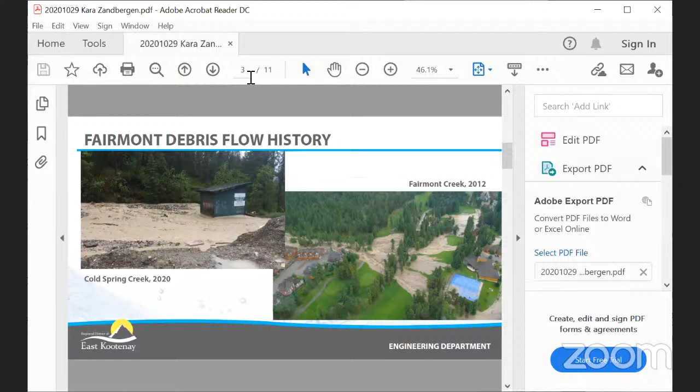So as we all know now, most of the community of Fairmont is built on the debris flow fans of Fairmont and Cold Spring Creeks. Sometimes we forget how the land under our feet was formed when there were large periods of time between events, but we have had some reminders in the last several years. In 2012, we had a fairly large debris flow event on Fairmont Creek. This was a big reminder for everyone of the hazard. Very thankfully, it was a reminder that came with some property damage, but no loss of life. In 2013, we had smaller events on both creeks, and then again in 2019, and most recently, we had our May 31st event this year. Next slide, please.

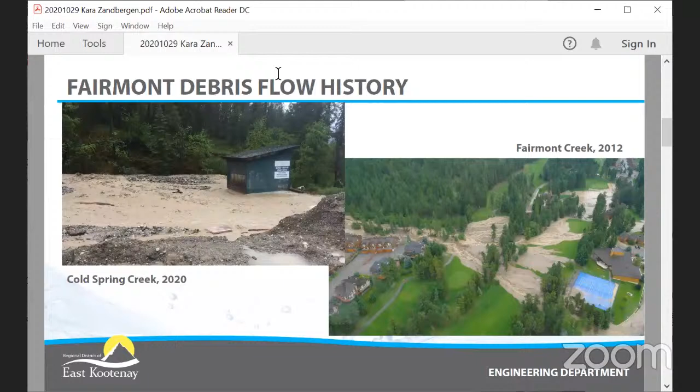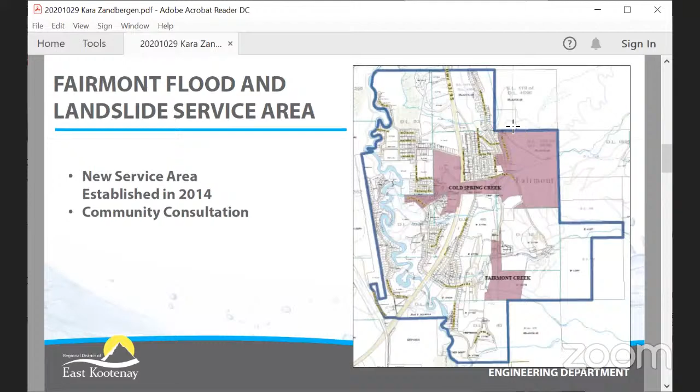So we wanted to discuss some of the services that are provided by the Fairmont Flood and Landslide Service Area. So we conduct regular inspections of the mitigation structures, and we report on them to the province. We do maintenance, debris removal from the containment basins, and any other repairs that are required, like riprap repairs or vegetation control. We apply for grants so we can move forward with our larger mitigation projects. We plan and manage these projects. We coordinate the response to the events that are occurring on our creeks, and we communicate with our stakeholders. Next slide, please.

So the current service area tax averages roughly $70 per property per year, and this is what we use to pay for all of the services described previously. So in addition to our regular maintenance services, we need to build up reserves for the future projects that we know will be required on both creeks.

We seek funding for all of our projects, and we've been very successful in the past. Most of our funding programs require that the local government provides a percentage of the total project cost. It can be anywhere from nothing. We've had projects that are 100% funded, up to 33% is not uncommon.

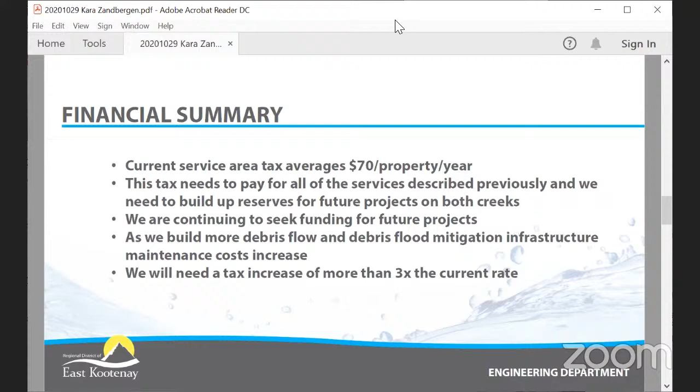I've given an amount of more than 3 times, and this is really rough. When we come back to you in a few months, we'll have an exact number, but we really just wanted to give an idea of what kind of increase we would be looking at. Next slide, please.

So while the focus of today's presentation is Cold Spring Creek and that project, I wanted to just talk really briefly about the work that we've already done on Fairmont Creek. So we had the large event in 2012 that we all know about. In 2013, we had a hazard and risk assessment completed on that creek, and it came with suggestions for mitigation projects to reduce the hazard to the community. We moved forward with these recommendations as quickly as we were able to. We started in 2013, we did some repairs on the Marble Canyon area that was paid for by DFA.

In 2015, we completed phase 1 of the mitigation, and that was widening the channel through the golf course and building berms to keep the debris within the channel. And in 2016, we worked on our phase 2 project, which was large debris basins and containment weirs upstream of the Fairmont Hot Springs Resort. We also installed a weather station at that time, and we were looking to use that weather station for an early warning system.

So the phases on Fairmont Creek all work together to reduce the hazard to the community, and that's recognizing that we can never reduce it to zero. There will always be some remaining hazard, and we will have more projects on Fairmont Creek in the future also. Next slide, please.

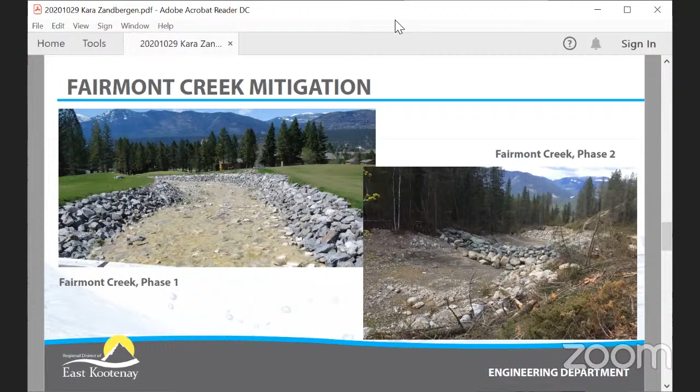So moving on to the Cold Spring Creek project that we're currently working on right now. We had a hazard and risk assessment completed for Cold Spring Creek in 2015. In 2019, there was a debris event on the creek, and at that time we had the upper watershed assessed again by a geotechnical engineer. They gave recommendations for mitigation works on the creek, and the recommendations were based on both of these assessments.

We used this information to apply for funding through UBCM's Community Emergency Preparedness Fund Structural Mitigation Program about a year ago in October 2019, and we were awarded the funding in early March of this year. So that was a funding amount of $750,000. We added $150,000 from the service area reserve to bring the total project budget to $900,000. Next slide, please.

So we started right away to procure an engineer for the project. So we had a competitive request for proposal process. The contract was awarded to McElhanney in May of this year. McElhanney had partnered up with BGC Engineering, and the team recommended that the hazard assessment for the creek be updated prior to beginning the design phase. The assessment was completed roughly a month ago, and noted that there is potential for large damaging debris flows on Cold Spring Creek. Next slide, please.

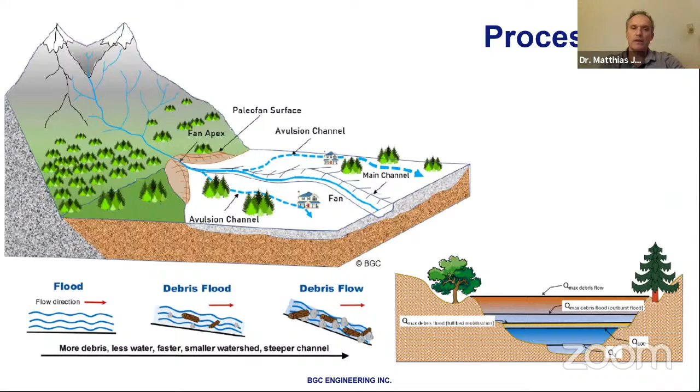Their density is much higher. They can be almost as dense as the rocks they carry. And that particular characteristic makes them carry rocks up to several meters in diameter. Their recognition, therefore, is very, very important, because if bridges, culverts, or other stream crossing infrastructure is designed for floods or debris floods rather than debris flows, that can lead to a lot of damage.

Now let's switch back to the debris floods. Debris floods have inundation potential. However, inundation is typically with water and sediment at a fairly low flow depth. Debris floods are very well known for being highly erosive, and debris floods have in the past eroded banks, often up to 50 or 100 meters, such as what occurred in 2013 in floods in the town of Canmore on the Upper Bow River. You're probably familiar with some of those pictures.

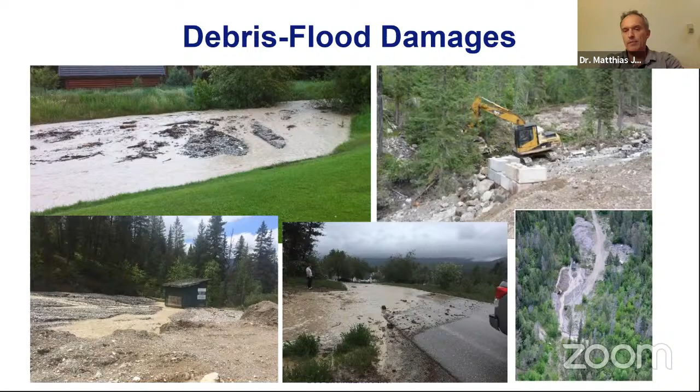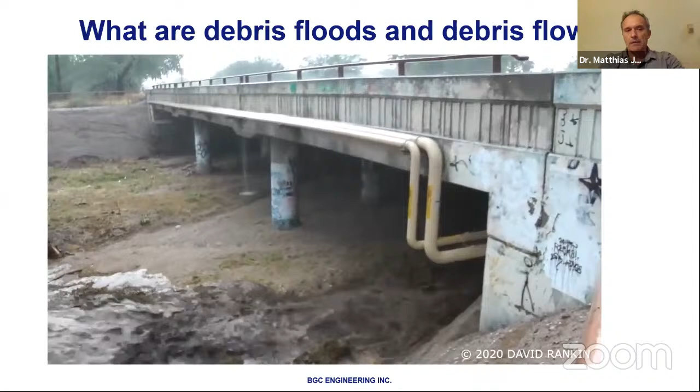Now, the difference between debris floods and debris flows is best explained when we just look at a few movies, this one being from Arizona and occurred this year. What I'd like to point out is how quickly these events unfold. Small watersheds are very responsive when it comes to high intensity rainfall. In other words, it doesn't take a day or days for the water in the watersheds to accumulate, but it can take an hour or less.

That's particularly relevant in watersheds like Cold Spring Creek that have a lot of bedrock. Water level can rise fairly quickly, and here you can see multiple streams that coalesce.

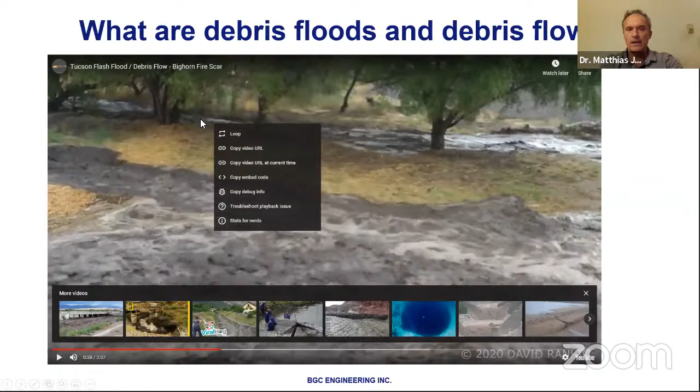And in the next slide, I will show you an example of a debris flow, which is a very, very different beast. And I would like you to be aware that the channel width here is about 20 meters, and the largest boulders being transported in this event are up to 6 meters. This is a creek channel called Illgraben. Graben is like gully, in the Swiss Alps, and curiously it has the exact same watershed area as Fairmont Creek, and indeed shares very many characteristics of that watershed in terms of sediment supply.

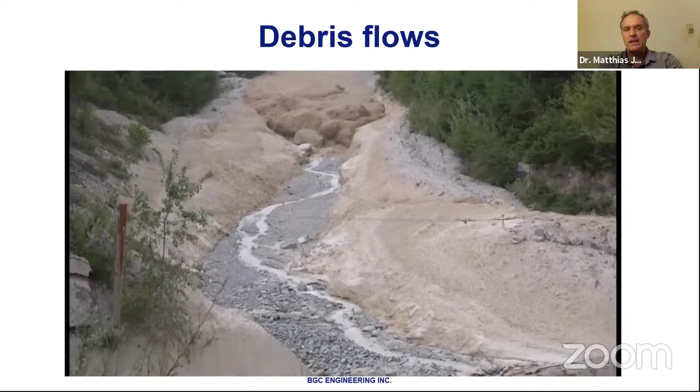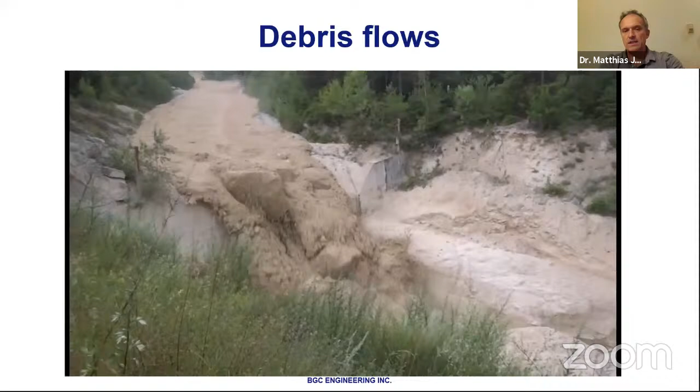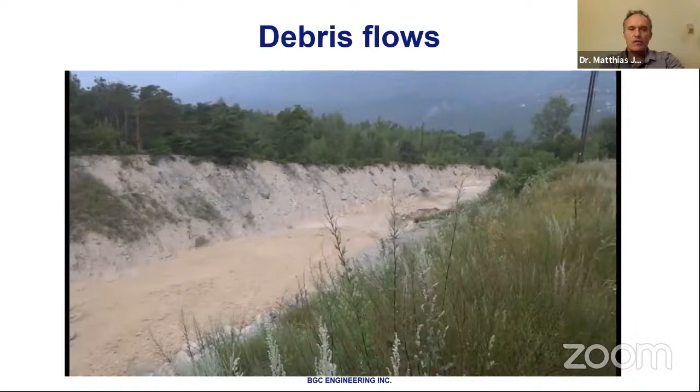While the approaching mass here seems to be slow, it comes down at about 5 to 6 meters per second, which is roughly 25 kilometers an hour. Therefore, you would have to be a formidable sprinter to run away from this mass. The largest boulder that is about to fall over the weir here is 6 meters in diameter. And that gives you an appreciation of the tremendous impact forces that debris flows like these can have, but it also gives you an idea how easy it is for a mass resembling liquid concrete to transport very large boulders.

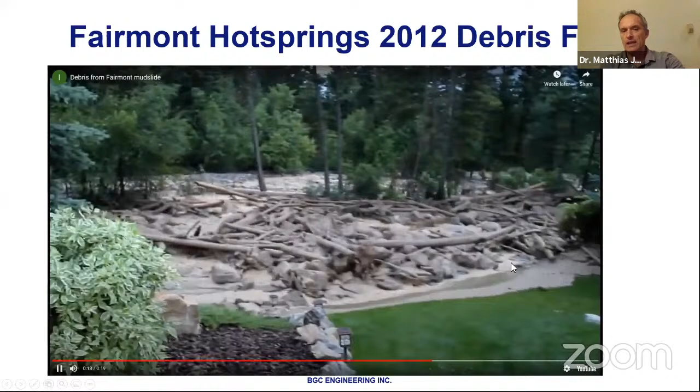And then last but not least, just a reminder of the Fairmont Creek debris flow of 2012. These images have been taken after the debris flow had come through, but note the very large boulders and the interbedded large organic debris that is preferentially being deposited at the side of the river and having avulsed out of its channel.

So there is a very well thought out method in doing these hazard and risk assessments. First of all, one needs to recognize what type of hazard one deals with. And that we can do by looking at the watershed characteristics, as well as looking at the sediments that we encounter in natural cross sections, as well as in test pits, of which we were able to dig about 5 of them all over the fan.

Then, with a variety of methods, some of which I will explain, we can establish a frequency magnitude analysis, which answers the question how large and how frequent these events can become and have been in the past. Once we've solved that, and with our knowledge of the physics of such events, we can put data into our computers and create an equivalent fluid of the real thing that behaves just like a debris flow. However, just on the screens of our computers, and we don't have to run any physical models.

From that modeling, we can derive particular hazard scenario maps, which show for each return period how debris floods or debris flows may behave. We can then combine all of these maps to create what we call a composite hazard map, which illustrates the hazard, meaning the probability of the events, as well as their intensity, proxied by their impact force. Second steps then, that we will work on later, are determining the consequences of these events to built infrastructure. However, this is not part of my presentation tonight.

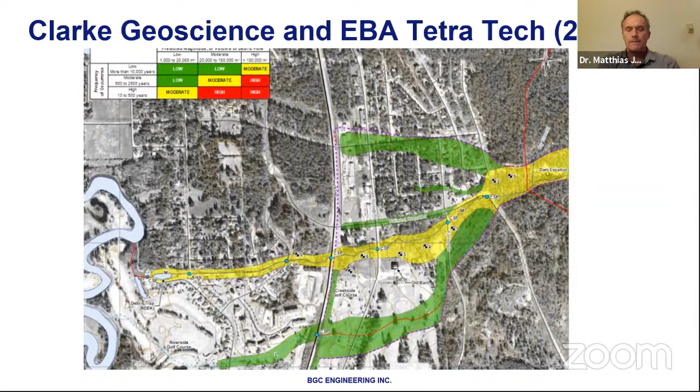We updated this study, and as you may imagine, science has advanced. Unfortunately, the news is not good. Our hazard results are significantly different, i.e. worse than those shown in the 2015 work. One of the first things we did is we obtained from the district LiDAR imagery, which is highly precise topography of the fan itself and the watershed.

These islands are remnants of glaciolacustrine terraces, which developed when the entire valley was a lake dammed by glaciers up to roughly 11,000 years ago. When these damming glaciers in the last ice age disappeared, these lakes drained, probably catastrophically, and left behind these silty terraces that flank the entire Columbia River Valley on either side. The debris floods and debris flows that followed this event then scoured these terraces and connected the debris flow fan with the Columbia River floodplain, but left some remnants, this one on which the current graveyard is situated.

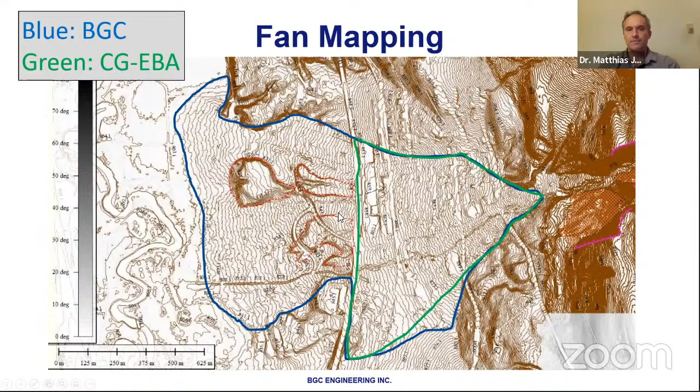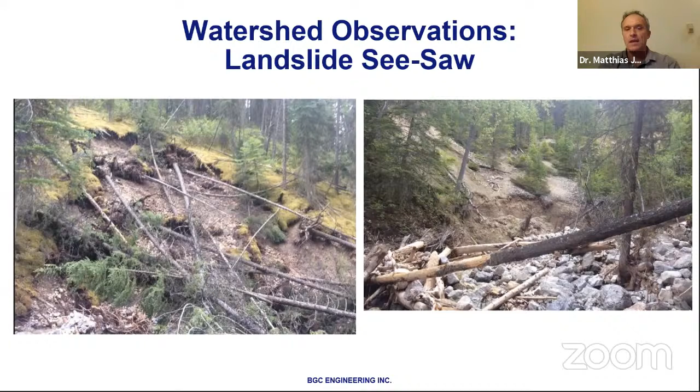However, a close examination of the LiDAR precision topography revealed that the lower watershed is riddled with deep-seated large landslides, many of which are either inactive or what we call dormant. Dormant means exactly what the word says. They are sleepers, which under changing climate conditions, or if undercut by either fluvial processes or by anthropogenic interference, can reinitiate, thereby shedding more material into the creek.

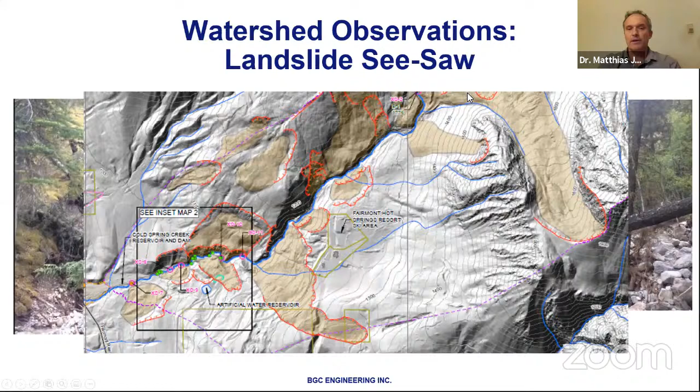A very notable feature we identified is what we call now the Cold Spring landslide, which started way up here in the watershed and was rather deep-seated, so something like 70 meters deep, millions of cubic meters of debris. And it went not only to the creek, but as you can see in the next slide, crossed the creek.

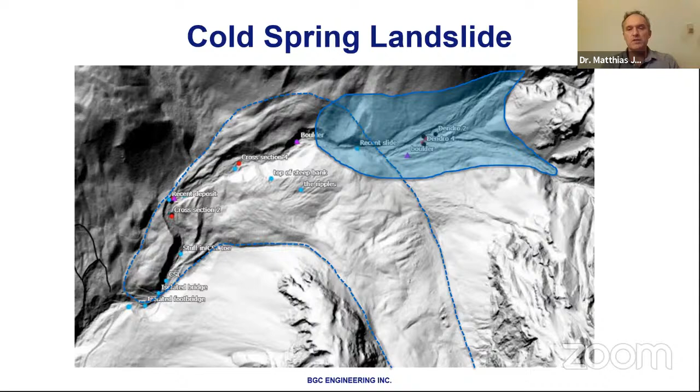We also noted during our first drive-through across the fan area, and I'm sure you're all very familiar with that, that the fan is riddled with large boulders, some of which have been used ornamentally in people's front and backyards. We compared the lithology, so the geologic makeup of these boulders, with the different geologies defined in the watershed, and discovered that they must have come from the watershed itself.

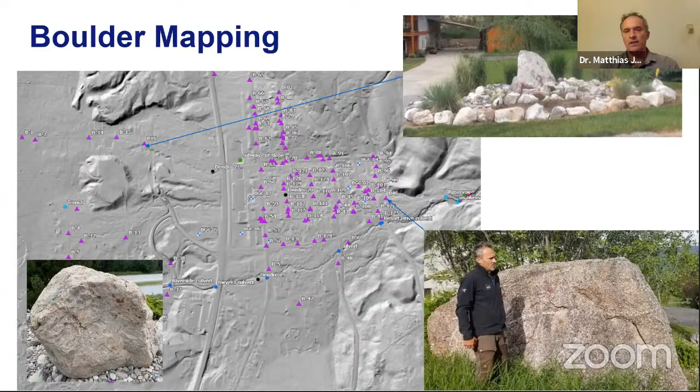However, when you compare the caliber of boulders that have been moved in the 2020, 2019, or 2013 debris floods on Cold Spring, with the size of this boulder that I'm standing next to down here, it is clear that those events that you've witnessed in the recent past are clearly unable to move these large boulders. So that, of course, begs the question, how did they get there? And the only rational explanation, given that this is an alluvial fan and not a glacial deposit, is that they were moved by debris flows, much larger than what has been observed in historic time.

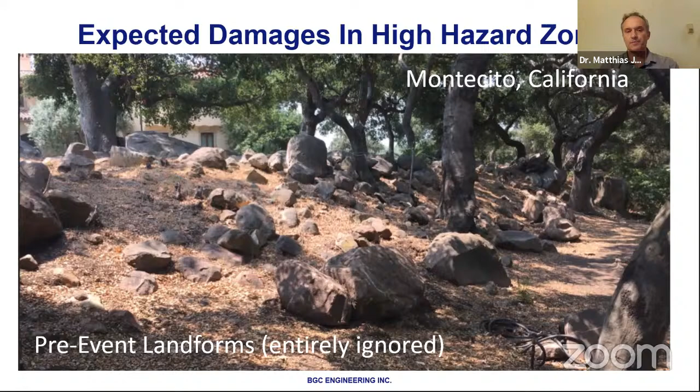One other thing we did, and we are very grateful to the district and to Fairmont Hot Springs to facilitate that, because it is somewhat invasive. We were able to dig 5 test trenches down to approximately 4 meters deep. And these are for us a wonderful opportunity, not only to decide what kind of event occurred, but also to date these events. The what kind of event occurred is manifested in what we call the sedimentary stratigraphy.

The lovely thing about these ancient soil horizons is that they have organic material in it. And using the carbon isotope 14, one is able to extract materials, even very small pieces in milligram weight, send them to a specialized laboratory that uses the decay of carbon isotope 14, its half-life, and analyze the age of this soil horizon, which then provides a maximum date to the overlying debris flow units.

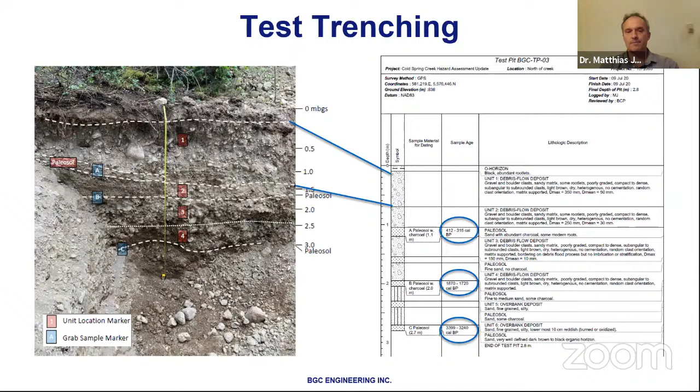Another technique we use is dendrochronology, so the science of tree ring dating. The particular science that we use here is called dendrogeomorphology. And it is the science to use trees to decipher geomorphic, so land surface processes that have occurred in the past. It's a very elegant method, and we call it also an absolute dating method because we can determine the exact year of occurrence, unlike the radiocarbon dating, which typically gives us a range of, say, 50 or 100 years in which an event has occurred.

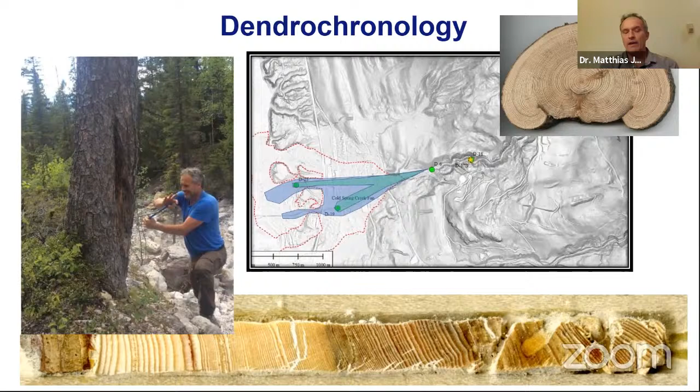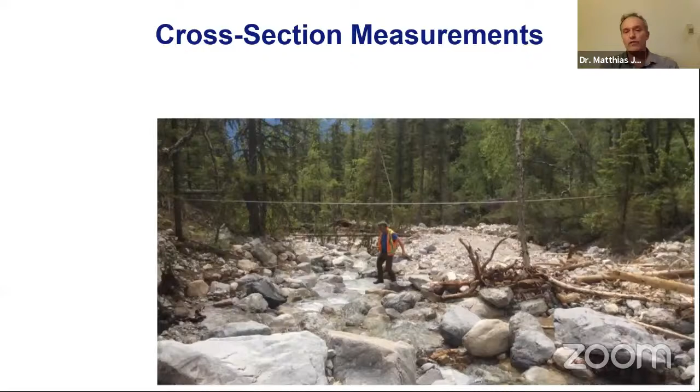We also noted that there were so-called boulder levees paralleling the creek in the lower watershed. By using a standard measuring tape and a stadia rod, we can measure the cross-section area that has been occupied by debris flows in the past. And if there's old impact-scarred trees on the side of the channel, we can not only tell how large the discharge was of a past event, but we can also tell when it occurred. And that, of course, feeds into this all-important frequency-magnitude relationship.

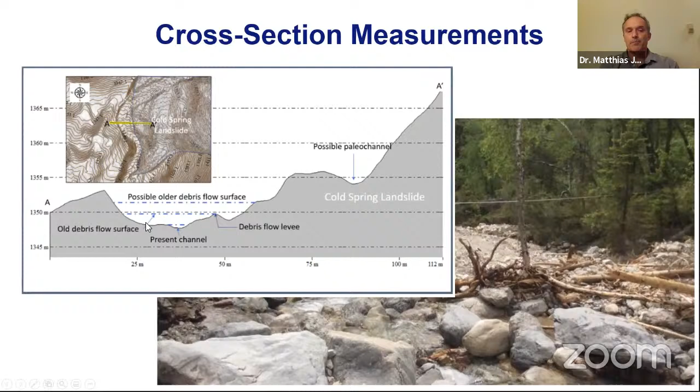When the cross-sections become too large for our measuring tape, we can go back to the precision topography and reconstitute the cross-sections of interest right on our computers and do the same exercise as I just explained.

Now, when we take all of these pieces of the puzzle together, first, some empirical methods that relate fan area to frequency magnitude, the dendrochronology, the radiocarbon dating, paired with some professional judgment, we can establish these so-called frequency magnitude curves. I'd like to explain those.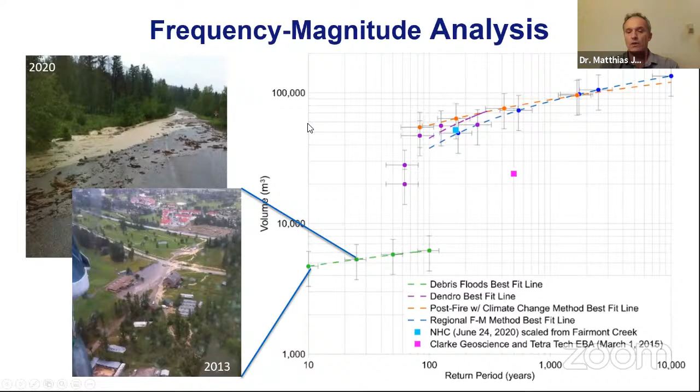Now, there are a few other things that are important looking into the future. You've all heard about the effects of climate change, and they're no longer something that happens in the future. They are occurring now. I'm sure you hear time after time things like the 10 warmest years ever measured on Earth have been actually in the 10 last years. This is not a statistical coincidence. This clearly signals human interference. Same thing with Arctic sea ice. Yet again, this year we broke the record for the lowest Arctic sea ice.

Take glacial melt. Glacial melt is rampant throughout the world, and there are papers that forecast that most glaciers, mountain glaciers in British Columbia, will have disappeared by the end of the century. We have by now put so much carbon dioxide and other greenhouse gases in the atmosphere that we've raised the temperature to what we have not seen for roughly 100 to 200,000 years. By mid-century, we will be at a point having temperatures that we have not seen for maybe 3 million years. And by the end of the century, by perhaps 10 or more million years.

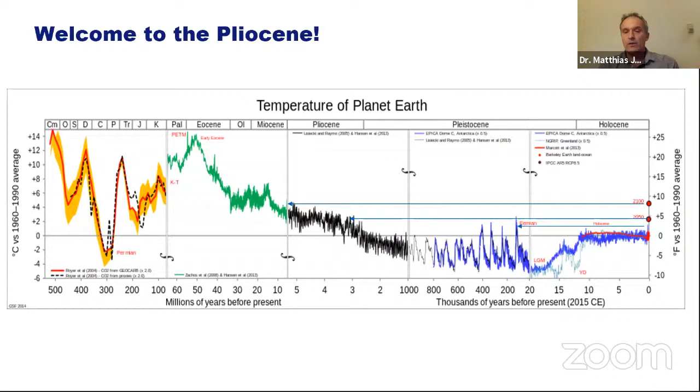Now, the time of human sedentary habitation, in other words, when we went from a nomadic lifestyle to one where we dwelled in cities and villages and so on, is the last 10,000 years, the Holocene era, in which climate was very well behaved, despite the little ice age that occurred from about 1500 to 1850. It was a very smooth ride. That is no longer the case. Now, question is, why am I telling you that? Well, there are some direct applications of that message to our watershed.

One thing is that a warmer atmosphere can contain more water. There's an old law, old meaning it's almost 100 years old, invented by two physicists, a German and a French, I believe. One was called Clausius, the other one Clapeyron, and they discovered through experiments that with 1 degree Celsius temperature increase, any air column or air volume can contain 7% more water. So if you imagine you warm up a piece of atmosphere by 3 degrees Celsius, that then would hold 21% more water. And indeed, the most sophisticated climate models now show that this simple rule holds fairly well.

There are exceptions. In the tropics, there's a thing called the super Clausius-Clapeyron relationship, which means a doubling of that 7% to 14% per degree Celsius. For the area of our interest, we can expect by the end of the century maybe a 100 to 150% increase in high intensity rainfall frequency, meaning a doubling or more of highly intensive events. In central British Columbia, that's a lot more dramatic.

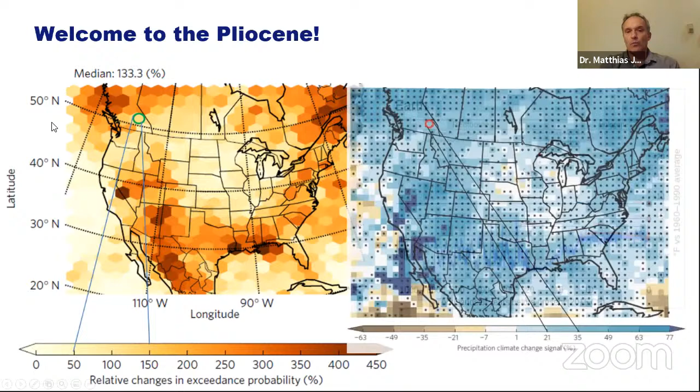However, we also, and that's the right-hand graph, look at the intensity itself. The left-hand graph is the frequency of occurrence of high-intensity precipitation. The right-hand graph shows the magnitude of the change. And what it tells us, and that is very much in line with this Clausius-Clapeyron relationship, is that by the end of the century, we can expect something like 20 to perhaps 35% increase in the volume of high-intensity rainfall.

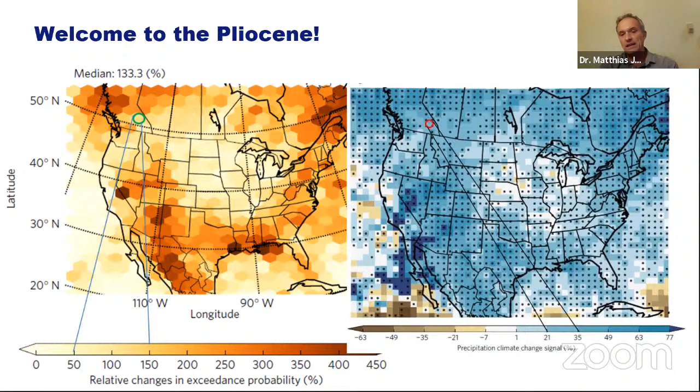Now, if you take more frequent and higher intensity rainfalls, which are, of course, distributed differently in different seasons, together, that means, without doubt, that debris floods and debris flows will become both more frequent and of a larger magnitude. And that's not good news.

There's another thing that plays a role that is directly associated with climate change, and that is permafrost. Permafrost means perennially frozen ground. And that does not imply that it is frozen from the very top downwards. Nope, there is what is called an active layer that unfreezes seasonally, i.e. in the summer.

Well, every rock mass is jointed. These joints are natural ingresses for water, either through snowmelt or rain. As that water infiltrates into the joints, it goes to below the active layer that unfreezes seasonally and refreezes. That refreezing does a number of things. One is the thermal expansion of ice, which is 9%, loosens the rock itself. However, as long as the ice remains in the permafrost zone, it acts like a glue, like a cohesive agent that does not allow rockfall to occur, or at least significantly hampers rockfall.

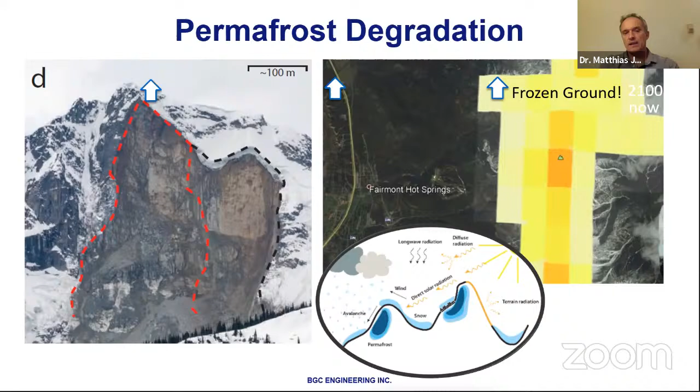This isn't the only large rock avalanche that occurred in southern BC; there have been 4 or 5 over the last 10 years, which is at a frequency that has not been observed so far. Of course, hinting that climate change is playing an important role here.

So if you look obliquely, this is a Google Earth image, over to Cold Spring here on the left and the Hot Spring watershed on the right side, and you imagine that the lower limit of permafrost is this yellow line, it creeps up year after year as, with greenhouse gas emissions, global temperatures increase. With this creeping up of the lower limit of alpine permafrost and the degrading of its permafrost, we will expect and we will see more and more rock falls and rock slides that detach along rock discontinuities, thereby feeding more material to the digestive system, if you will, of these creeks.

So we have a number of unpleasant consequences of climate change interacting here. One is higher frequency of intense precipitation. Second, more intensity packed into these events. Thirdly, mountain permafrost degradation. And fourth, due to the drying trend in the summer, in between big storms, the stress on the forest will increase either through beetle infestations or just drought stress, which means that the forested portions of these watersheds will become more susceptible to forest fires. And once these places have burned, they are ever more susceptible to debris floods and debris flows.

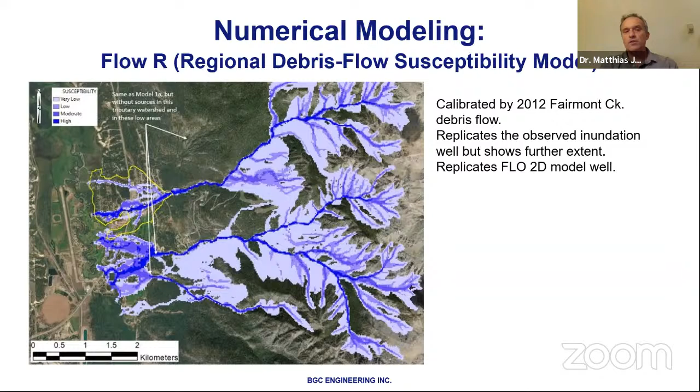So that was a screening level exercise, but then we went to a more sophisticated computational fluid dynamics model called FLO-2D. It tells us which areas are inundated, how thick the flow is, and how fast it is. So I'll give you 2 examples here. This is the low end of the spectrum we look at. This is a 3 to 10 year return period debris flood. So the garden variety debris flood that you've seen over the last few years. What it shows, and here's the fan apex, here's the highway, down here's the Columbia River floodplain.

It shows that all of these events overcome the capacity of the culverts, spill out of the channel, but the water flow is quite shallow. It's a few centimeters to maybe half a meter in more depressed areas, and of course in the creek channel itself. They're also not particularly fast. Where the creek jumps out of its channel, it's slow walking speed; where it's within the channel, it's a brisk walk, but still not a jog or a run yet.

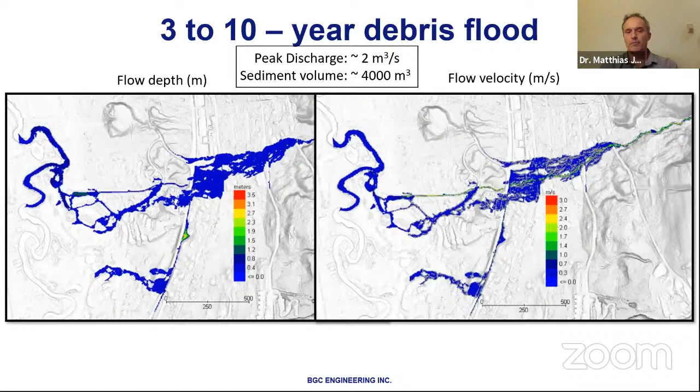An event of this magnitude has roughly 2 cubic meters per second, which means 2,000 liters per second rushing through a cross section. And the total sediment volume transported past the fan apex, which is up here, in a given event would be approximately 4,000 cubic meters. So 400 truckloads, give or take. And the expression of that is what you've seen before.

However, now when you go to a very rare debris flow, so one that has a 0.3 to 0.1% chance of occurring in any given year, and keep in mind, you have to multiply that by your life expectancy to get a probability of it occurring in your lifetime, which of course is significantly higher than the 0.3 to 0.1%. Then you get this result.

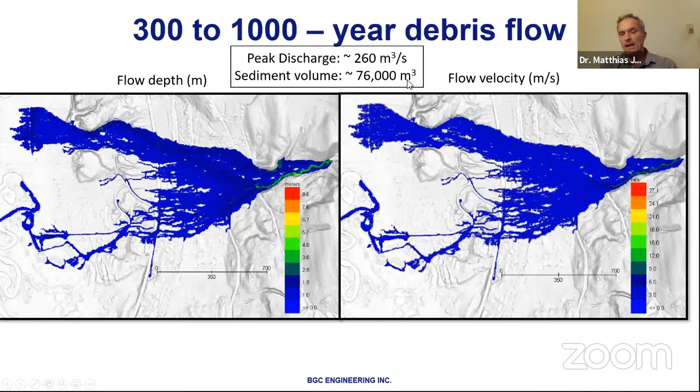Also, the peak discharge of this event is 260 cubic meters per second approximately, which is over 100 times larger than a debris flood that occurs at a 3 to 10 year return period. And the sediment volume of 76,000 cubic meters, of course, is orders of magnitude larger than the debris floods. So a completely different beast.

And you have indeed witnessed one of those. This is the 2012 debris flow on Fairmont Creek, which had a volume of approximately 64,000 cubic meters, and which created millions of dollars worth of damage.

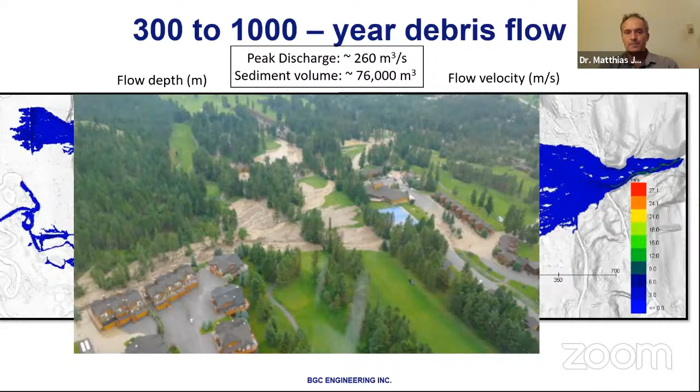Now, we were able to model these debris flows for each of the return periods we were interested in: 3 to 10, 10 to 30, 30 to 100, 100 to 300, and so on, all the way to the 1,000 to 3,000 year return period.

These return period classes are somewhat enshrined in guidelines that have been developed by the Association of Professional Engineers and Geoscientists of British Columbia. And once again, you can see dramatically the differences between these shallow debris floods and these deep, fast, and very destructive debris flows that happen more rarely, but they do occur.

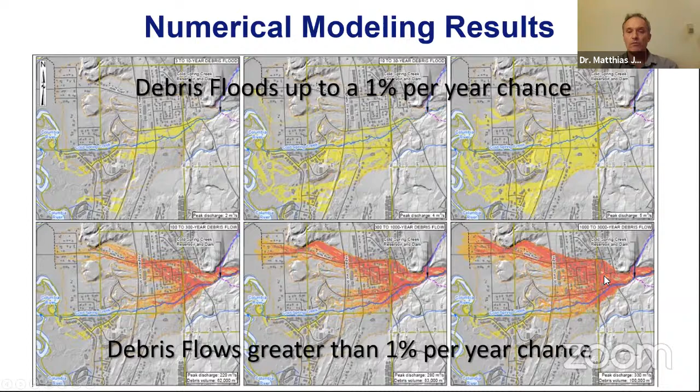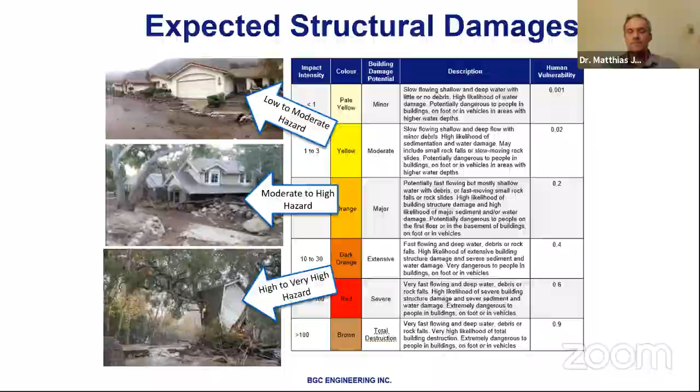While in the yellow zones, the impact forces are milder, and there more nuisance damage would be expected, and the building would probably survive and could be reconstructed or repaired at a much lower cost.

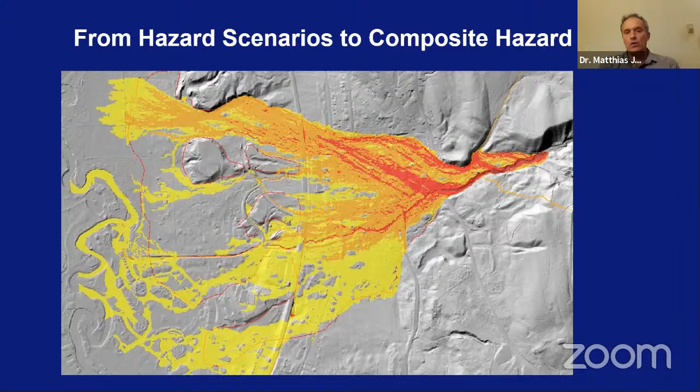We then take all of these model components and create what is called a composite hazard map. So we use every one of these individual return periods, combine it, and then multiply it by the frequency at which a certain zone is being inundated. What the red zone means is an area that is inundated often, and it is inundated by destructive debris flows. Orange is less often and less intensity, and yellow lesser yet.

That, of course, translates into red zones having a high chance of fatalities should these events occur. The orange zone, a moderate chance of fatalities, and yellow, a low chance of fatality.

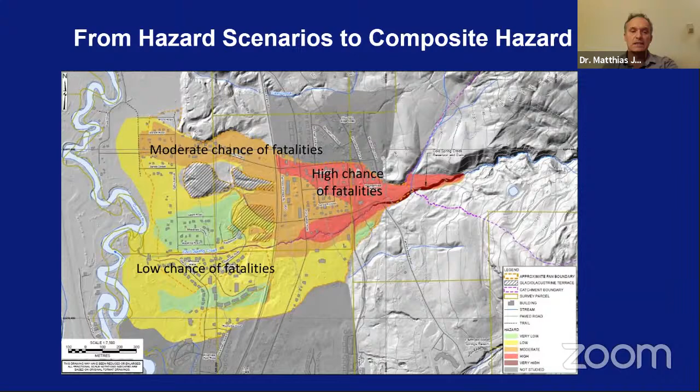So let me conclude then. Cold Spring Creek, and I hate to be the messenger of bad news, but don't shoot the messenger, is subject to debris floods and debris flows, which occur at different return periods. These hazards and risks that we looked at are substantially higher than had been believed in the 2015 studies. We've noted through our numerical modeling that debris flows may impact much larger areas and would be capable of causing fatalities.

There are other studies planned to determine just what the life loss risk is, and that allows us to optimize mitigation measures to reduce life loss risk as much as possible with the funds we have. That goes hand in hand with an option analysis where we compare the different types of debris flow mitigation measures that are possible, and then try to pick the best ones that not only reduce life loss risk, but also economic risks associated with loss of property, impact to homes, infrastructure impacts, loss of egress and access, and so on.

Last but not least, we're currently working on a proposal to develop a debris flow warning system, which is weather-based, which means that well before a storm reaches the area of interest, we can tell whether or not the storm will result in debris floods or debris flows, and how much sediment could be moved.

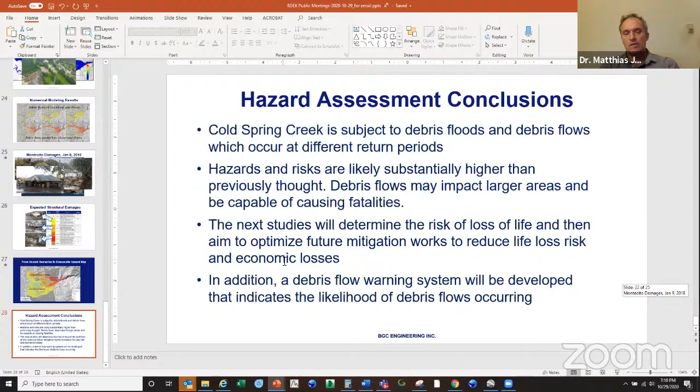That pretty much concludes my presentation, and I'll hand it over to Karen, who will enlighten you about the ideas and plans for short-term and long-term mitigation. And I'll be more than happy to answer questions after her presentation when the floor gets opened.

Thank you, Dr. Jakob. Our next presenter is Karen Prezelj. Karen is a civil and hydrotechnical engineer with McElhanney. She's based in their Fernie office and works across the East Kootenay. She brings local experience and practical understanding to her projects. Karen specializes in all components of river flood mitigation, including river hydrology, hydrological modeling, hazard mapping, design and construction of mitigation measures, and emergency flood support.

And her presentation today will focus primarily on the plans for phase 1 of the Cold Spring Creek debris flow mitigation project. So Karen, please go ahead with your presentation. Thank you. All right, yeah, thank you. Thanks for the introduction. Yeah, so as mentioned, I'll be discussing our proposed mitigation against debris flows on Cold Spring Creek. And again, focusing on phase 1, which is what we're working on right now.

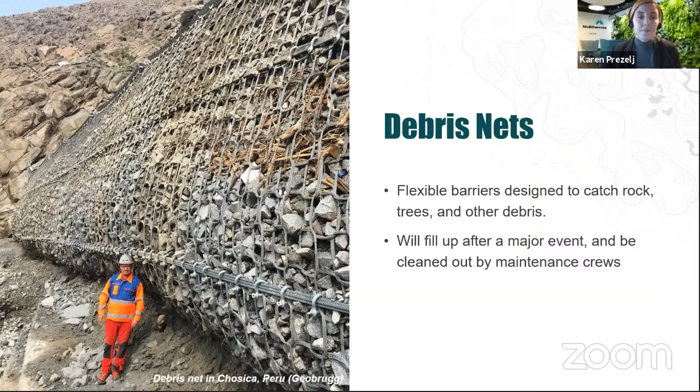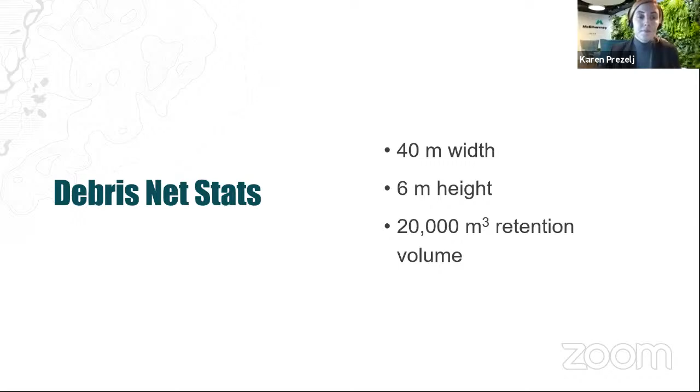We'll be constructing an access road from the Fairmont Hot Springs Resort Reservoir, where there's an existing access road, to the upstream side of the proposed debris net. This will allow for construction access, as well as maintenance and cleanout access once the project's complete. This access road will also provide recreational and wildlife passage over the debris net once the project's completed.

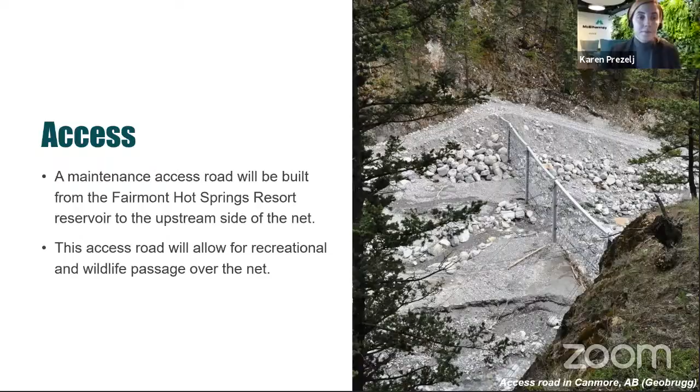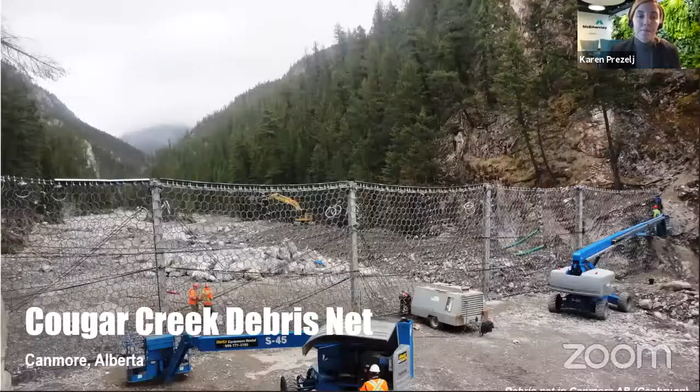All right, before I wrap up, I wanted to highlight a very similar debris net that was installed in Canmore, Alberta after the 2013 flood. It was installed on Cougar Creek, which is a creek with similar debris flow hazard, also located above a developed community. This installed net, as shown in the picture, has the same dimensions as the proposed Cold Spring Creek net, 40 meters wide and 6 meters tall, and it was designed to hold back a similar volume of debris.